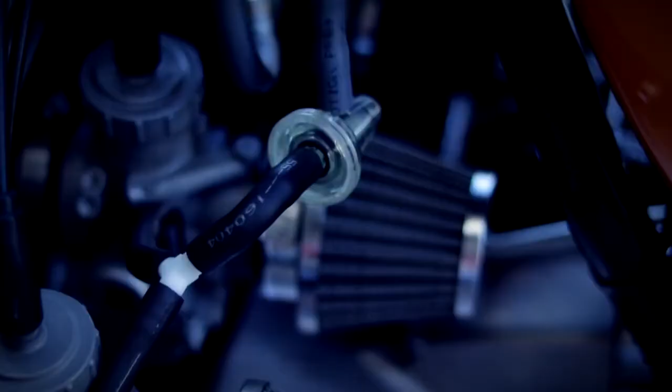We've done a bunch of 30-mile rides with the bike, and it's been flawless. We're running 100 low lead aviation fuel and 36:1 premix in the fuel oil ratio. Seems to run well.

Today is a special day. We're back at Kurt Jordan Engineering. This time we're going to test the Millyard 1250 Kawasaki 5-cylinder. And this is Kurt's shop, as you can see. Kurt, what, about 40 years of racing and tuning experience? Yeah, something like that. So we're getting the dyno set up, but there's a little bit of everything going on here. This is sort of a dream come true for you gearheads out there.

Everybody's been asking, how much horsepower, how much torque does this thing make? Well, we're going to try not to blow it up today, but Kurt's putting it in the computer and we're going to see what she does.

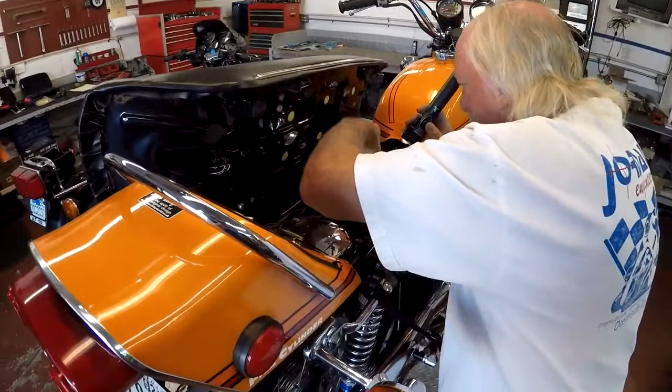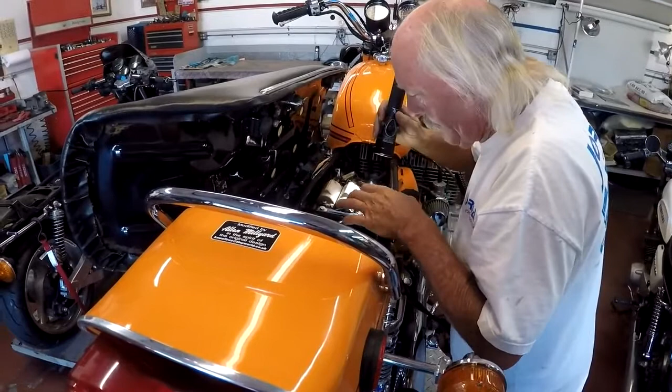So to get RPM setting, Kurt's got to find a coil. And on this bike, we've got 3 coils in the back, I think 2 coils underneath the gas tank. So 1, 3, and 5 are located back here, and that should give us a good source. Temperature on warm-up.

We're up to 267 miles. Right now the bike's running with 36:1 Castrol 927 and 100 low lead aviation fuel in an effort to stop or decrease detonation.

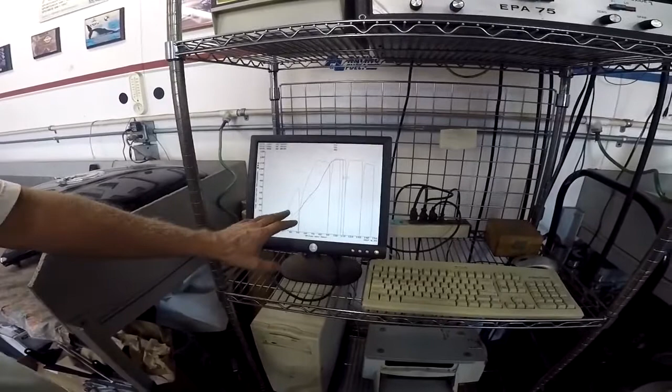About 120 horsepower, wow. And what was the RPM that we got, Kurt? Well, that's something I'm going to double check on the computer because it's running much higher on this track than this one. Okay. It was idling at 3,000. And I did set it up for 360 degrees every time the crank goes around on one push. We're going to double check that next after the smoke goes out. Yeah.

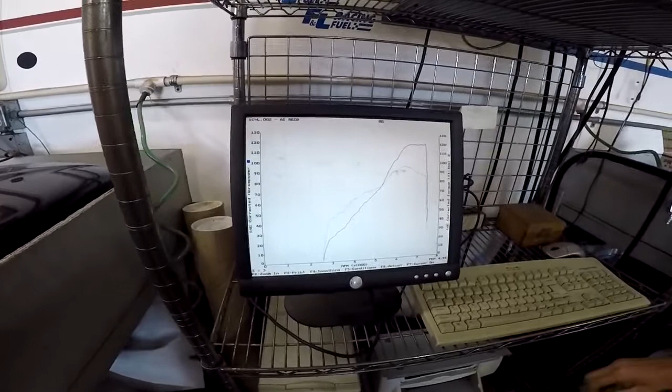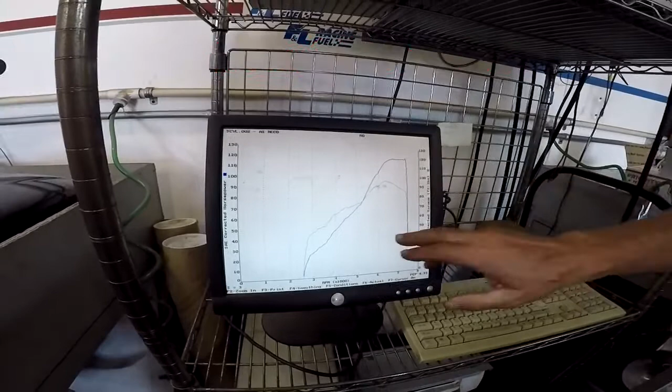So here is horsepower and torque. This is the RPM across the bottom. We started at 2,500 and ramped it to 7,500. And it's falling off right here, so no reason to ramp higher. And this is the torque graph here. So our maximum horsepower was about 121, 122.

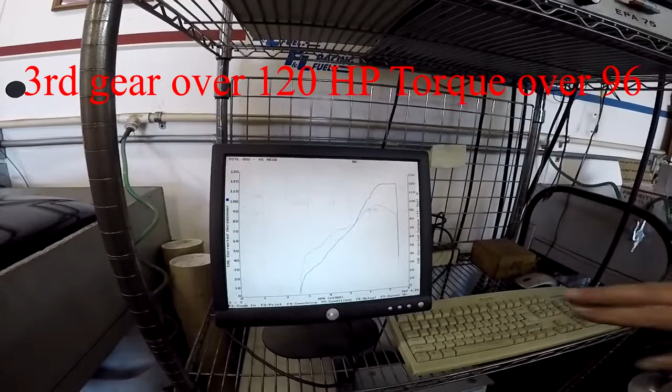A little bit over 120. And our max torque was about 96, 97. 96, right. But the torque is great. Look how it comes on early. Awesome. And that was in third gear? Third gear.

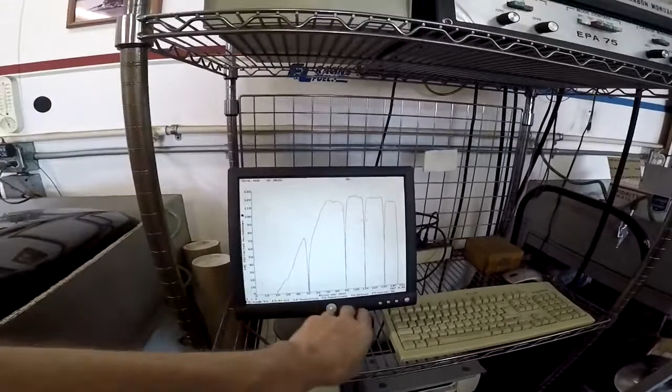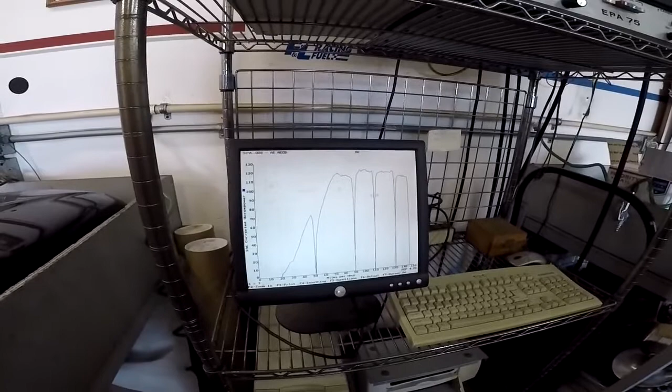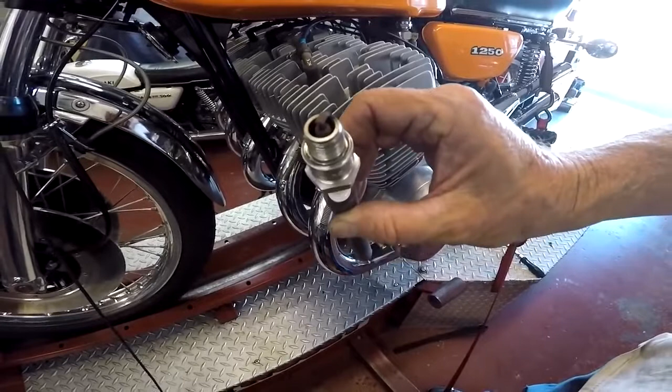We decided after the first several pulls we better check a spark plug. Kurt thinks everything's going well, maybe running a little bit rich. And we reached a top speed of 145 and about 78 foot-pounds of torque. Or no, more than that. 98. We'll have to double check. And about 121, 122 horsepower.

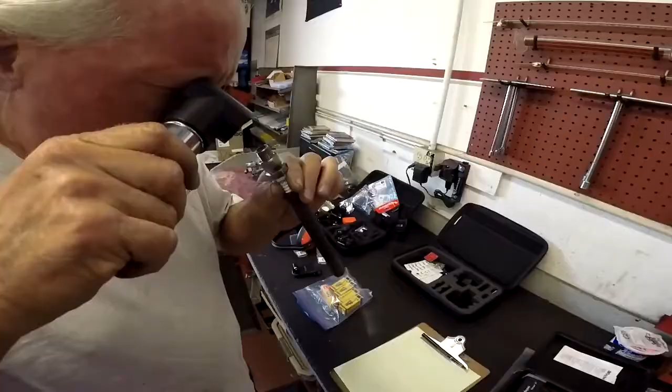Smoky in here. So this has gone a lot better than any experimental bike test has gone. And this is great. We got RPM pickup with that new pickup that made it a lot better. We got torque, and it's got a good flat power band. It's on the rich side, which is safe, and it hauls ass. So we don't need to run it anymore if you think you're not getting anything else out of it.

Well, I just want to run it up into gear and concentrate not on running the bike for the dyno test, but do a run just so I can see what the RPM difference is in the tachometer.

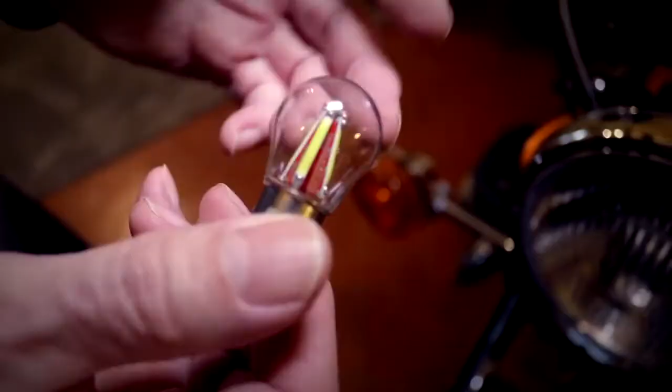The answer to that was to replace the front headlight, which is 55 watts, with a nice little LED unit, and that only draws 13 to 16 watts, and also replace the taillight bulb, which only draws about 3 watts. Gives you a big savings, and I've not run into an electrical problem on any of the longer rides we've done.

Thanks for watching our second video on the Allen Millyard 1250. The performance on the dyno was simply amazing. Over 140 miles an hour, 98 foot-pounds of torque, and I believe 121 horsepower. Kurt thinks we could have got a little more horsepower out of it with some finer tuning. And when I talked to Alan after sending him a teaser clip, he thought the clutch was even slipping a little bit. Really impressive overall, and the best news is we didn't blow it up.